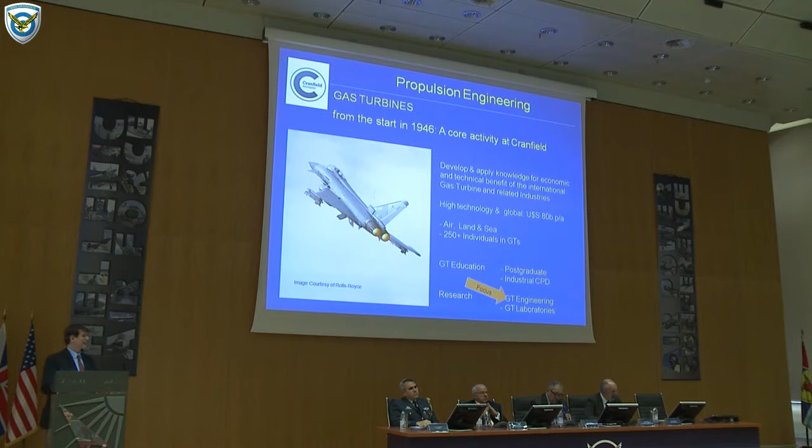In gas turbine engineering, the main platform of what we do is our mathematical representation of gas turbine engines. And this is our own inbuilt self-developed program called TurboMatch. And around it, we have a cluster of other capabilities to look at aircraft, to look at ships, to look at power plants, etc. It is this technology that has brought us a great collaboration with Rolls-Royce called the UTC and the AIRC with Airbus and Rolls-Royce, Aircraft Integration Research Center.

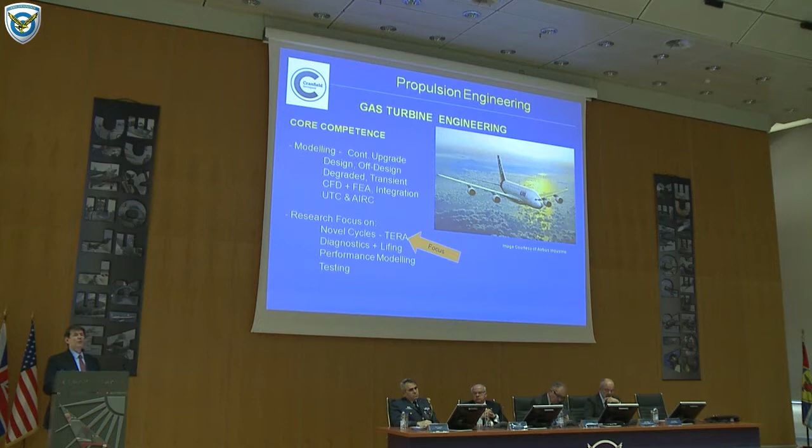We use this capability to evaluate novel propulsion systems and to evaluate novel technologies that can be applied to propulsion systems. And one of the important areas of development has been the TERA, techno-economic environmental risk analysis. Another area where we have been working on is the area of diagnostics and lifing, another area where there is a great deal of interest from user organizations. Then we also continue to develop this capability, and there's a lot of testing that takes place at Cranfield.

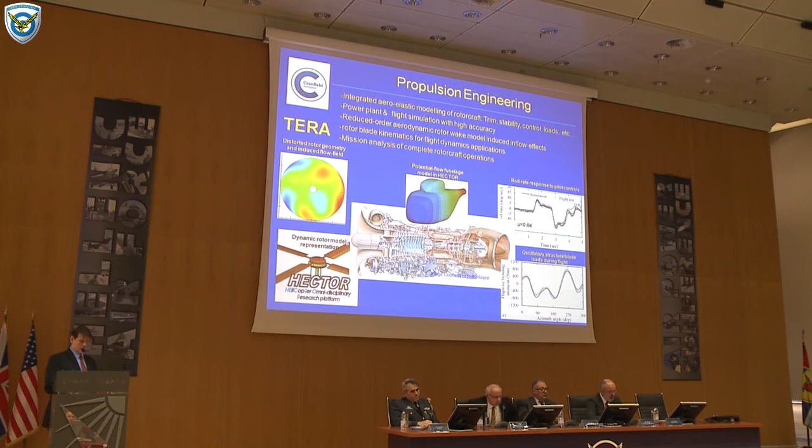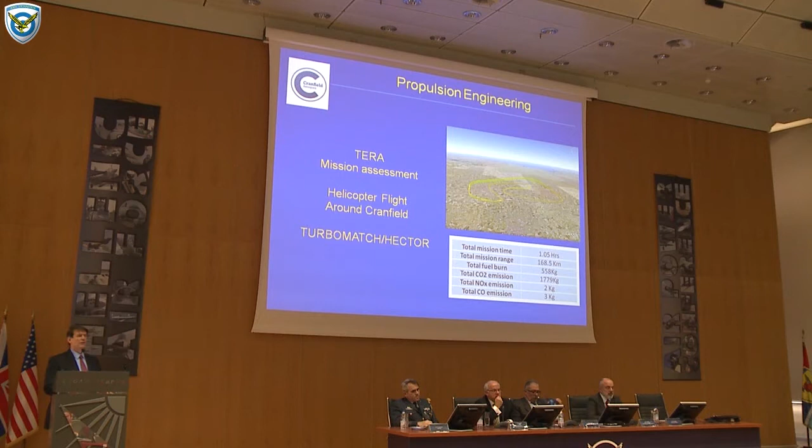And for example, here you have a typical mission that could take place; the starting and finishing point is, no surprise, Cranfield University. And in this particular case, we looked at a mission that is about an hour long, approximately about 170 kilometers. And then we can evaluate the amount of fuel that is consumed, the emissions that are produced. This is for a baseline. Then we could look at applying different technologies to this particular helicopter to observe what differences in the mission capability would come about. And it is the use of this particular technology, the TERA, that I would like to go on and tell you now about in application to a civil transport.

In this particular case, we're looking at an aircraft operator who is operating an aircraft that is very similar to a Boeing 737 with CFM56-7 engines. And we are bringing together the aircraft model, we're bringing together the engine model. We have included a blade model to understand the particular impact of the new technology we're going to be evaluating, a technology that is embedded within the overhaul process of the machine. And then to make the techno-economic evaluation of all these.

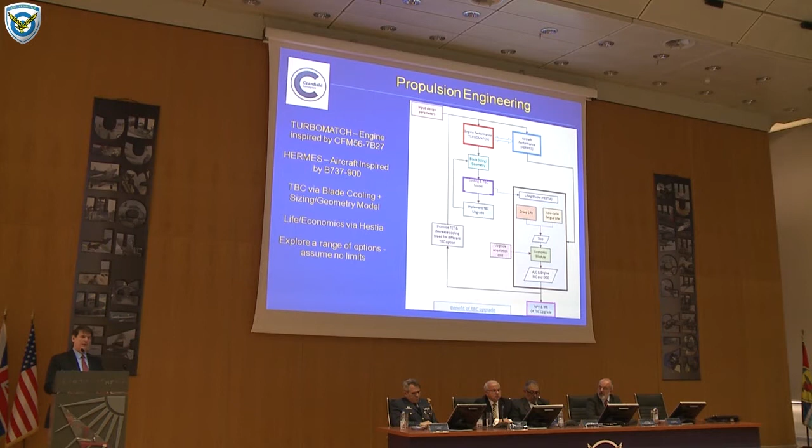So in the picture to the right, what we're looking at is a potential choice between 6 different thermal barrier coatings. And what we're now going to be assuming is that we are an operator that is flying this particular aircraft, and there is an offer from a particular agent to improve our gas turbine engine by offering this range of 6 coatings. And again, what we see in the picture is that the baseline aircraft, as we have it today, would be able to offer us 25,000 hours between overhauls. That's typically, for a normal transport, about 6 years between the repairs.

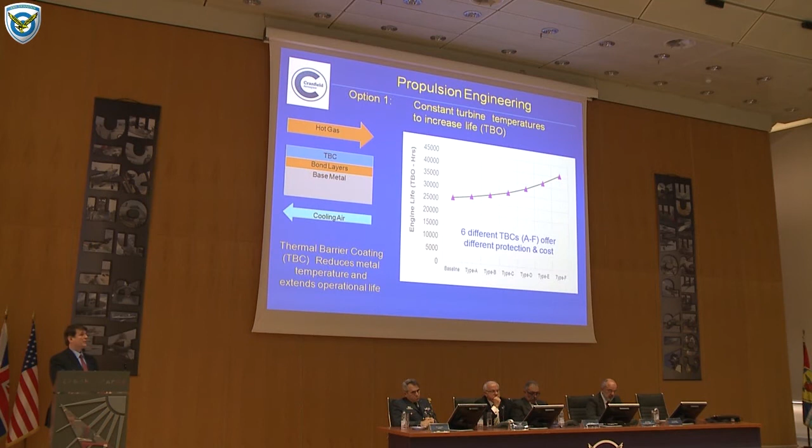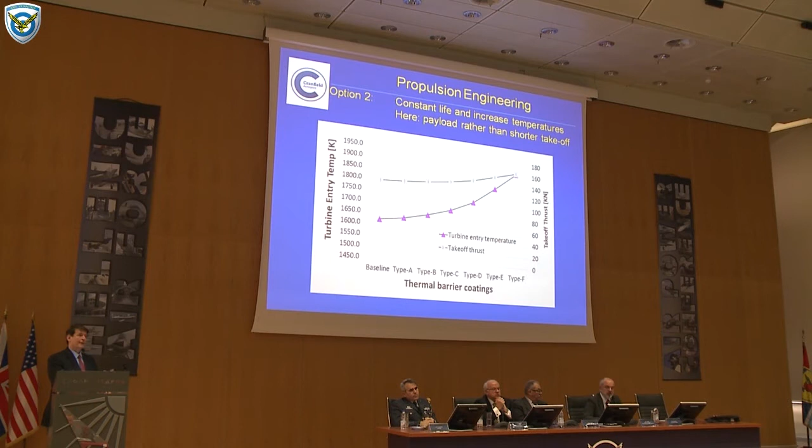What we have seen here then is the use of TERA across a particular mission. So we've broken the flight into something like 100 different segments to assess at each point of the flight what is happening to the engine. And what we have here is the examination of each one of these thermal barrier coatings from A to F: the allowable increase it would give us in turbine inlet temperature if we wanted to retain the same time between overhaul, in other words, to keep maintenance costs the same.

The question we then need to ask ourselves is, what benefit could this give us? And what we see here is the increases in thrust that have been evaluated, assuming that the base metal temperature has been the same. For this particular aircraft, we can see that there is a change in payload up to nearly 2.5 tons of additional payload, again assuming that there are no limits that would not allow us to carry it. So assuming there are no structural limits, we're assuming there is nothing else. So the question then, we can carry this additional payload, and what benefit would this give us? So we need then to evaluate the two different types of economic benefit.

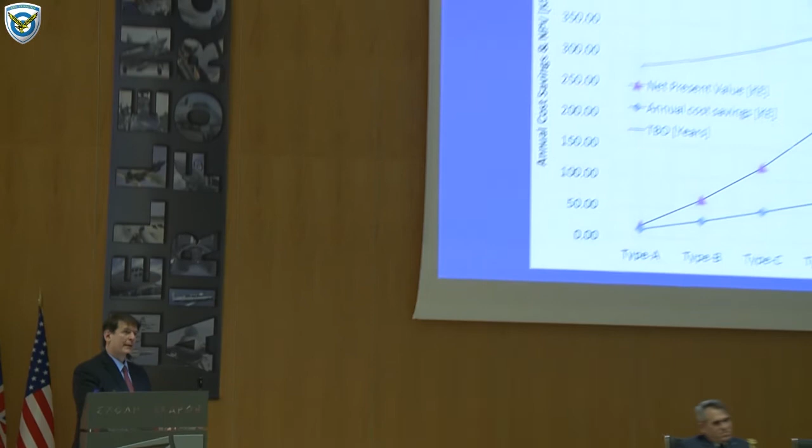The first one is looking at the possibility of keeping the thrust the same and the blade metal temperature lower. This is going then to give us a benefit in terms of the maintenance cost of the engine, and this is what we see here. If we use the thermal barrier coating to reduce maintenance cost, to the right, again, we can see the maintenance savings. So if we look at the savings that could be accrued from the different coatings, these are the lines with the blue diamonds. Every year, we could see a 100,000 euros reduction per aircraft from the use of the coatings. And we can compute the benefit in terms of the life that is going to be significantly larger.

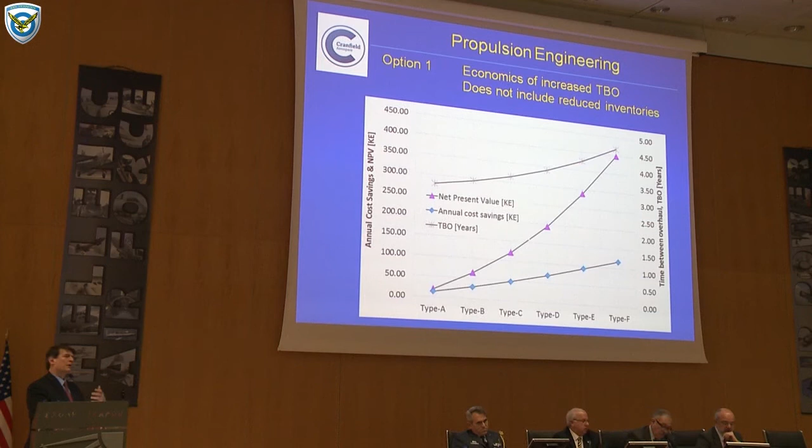So then one option is to use this thermal barrier coating to extend the maintenance life, to reduce the maintenance cost. In this particular example, the other option is to use the thermal barrier coating to increase the payload the aircraft could carry. These are the 2,500 additional kilograms that the aircraft could carry. And this, again, would give us a different type of benefit. In this particular example, with the numbers that we have used, the benefits are going to be significantly larger. So if we look at the net present value of the increased payload over the life of the aircraft, we can see that there is a 6 million euros benefit for the most advanced and most expensive of these coatings.

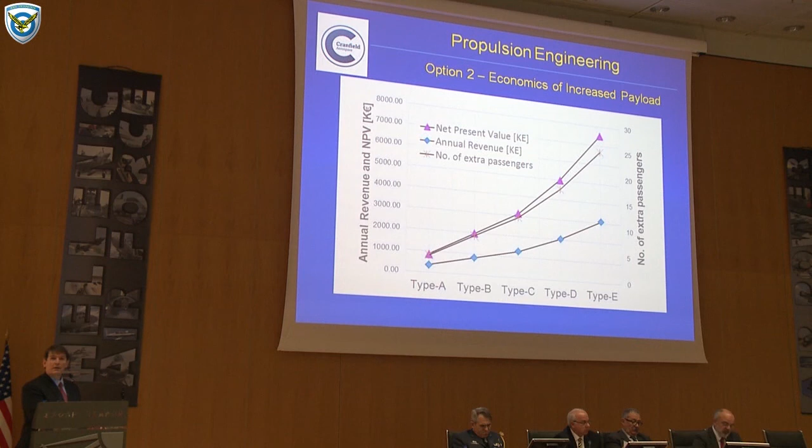So we have only looked at these two options. Other options that can be evaluated are, for example, how could we use this thrust to reduce the length of the takeoff run of the aeroplane? That would give it accessibility to more airports. Something else we could do is to use this additional thrust to give us increased capability in a hot day environment, which is a particular concern for many, many operators.

So this has been an example of the TERA, techno-economic environmental risk analysis approach that we have used at Cranfield. It brings together aircraft models and engine models; we haven't done it here, but emissions models as well. And the idea is it's a technology that could be employed by aircraft operators to evaluate the improvements, in a techno-economic sense, that an upgrade could bring.